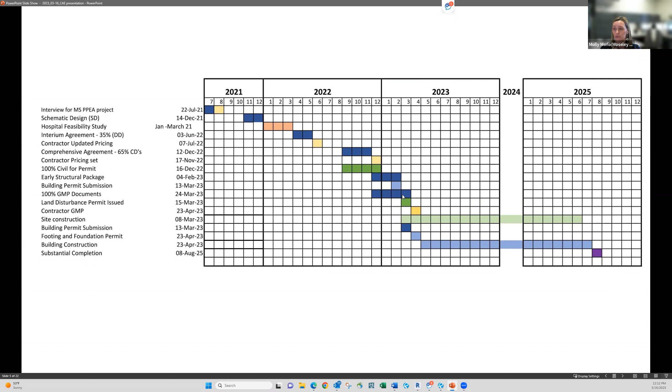Can you see my cursor when I'm talking? I don't know. Yes, we can.

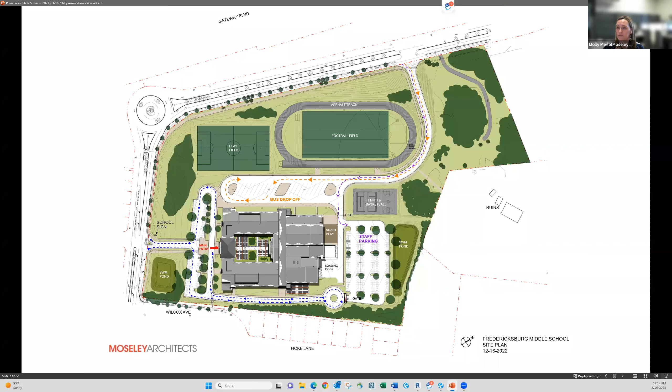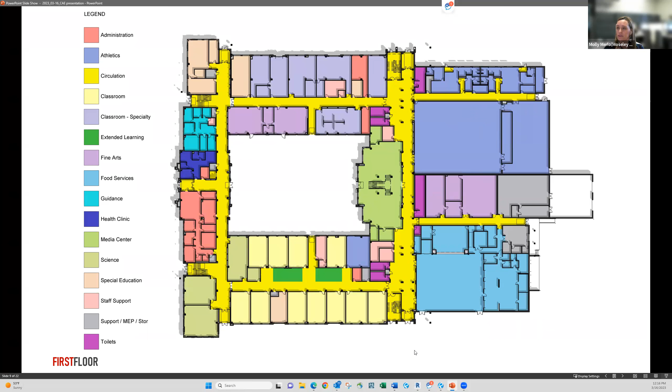I've got some renderings of that for later in the presentation. And then our kitchen, so a good multi-use space here with music behind. And then we've got a gym, an auxiliary gym in the purple with the locker rooms. That's our first floor, and then the looping circulation as well.

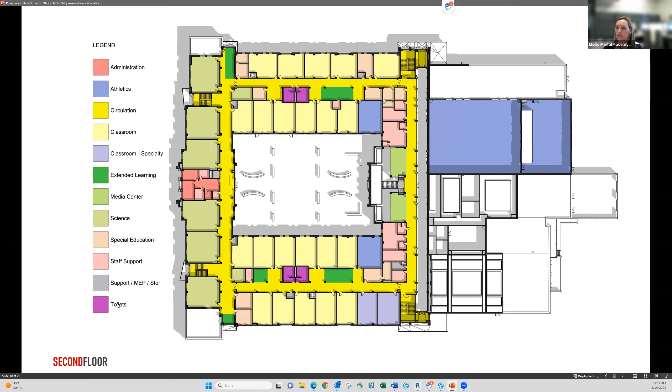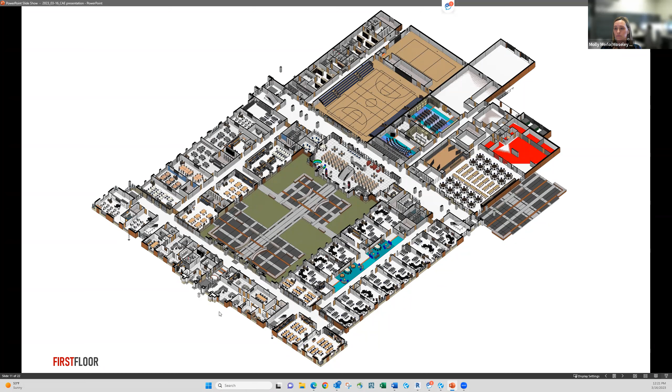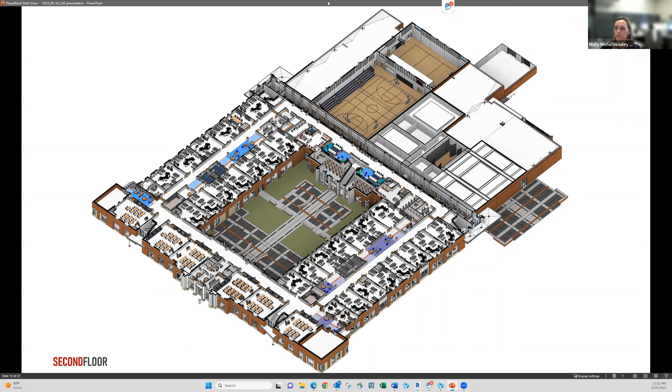And again, you see the second floor with the classrooms on either side, science toward the front. And then you can see the two-story extended learning overlooking the media center with a connecting stair, and then looping corridor connecting all of the academic wing together and easy access down to the first floor for the shared use spaces.

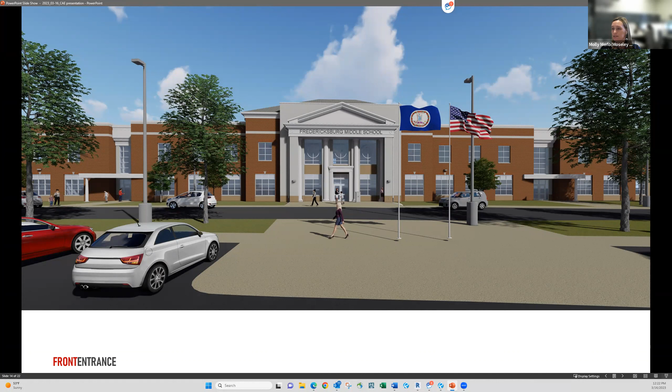So Fredericksburg being a little bit more classical and colonial architecture, especially the Idlewild neighborhood has a colonial feel to it. We stuck with more of a colonial approach for the school with main entry. There were proffers with the development of the school that it had to be mostly masonry, so this is a brick building. We do have some accent pieces here, but mostly brick with some FRP panels. And you can see the approach coming up from the parent drop-off toward the main entrance.

And then down the bus loop, you can see we've got several entry points - a welcoming entrance for after hours, prominent coming in for the gym or the cafeteria, auditoria, as well as entry points for during the day, the students coming and going.

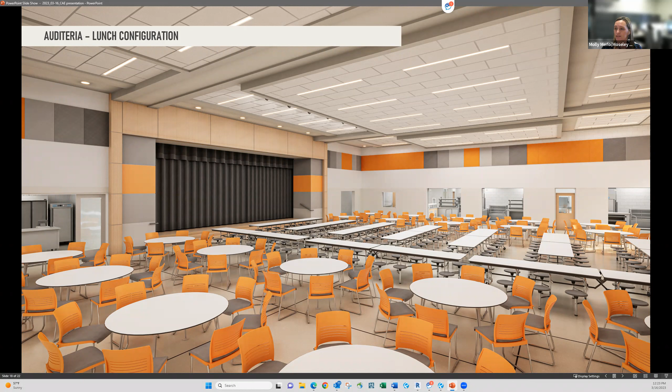And then this is the auditeria. The colors have not been set yet - this is a potential rendering. We have not decided on all of the color scheme, but this is one possible color scheme. And then this would be when the auditeria is being used for lunch, with the doors open to the kitchen serving lines and snack line.

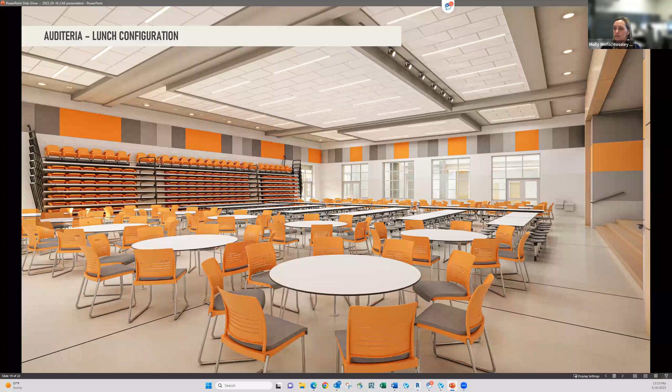So that's kind of an overview of the project, where we're at, and happy to hear if anybody's got questions or thoughts as we're coming into the finish line here.

Really excellent. Cool. Hey, thank you Molly. I have a question.

Sorry, I was a little late, but in terms of I see those extended learning collaboration areas - is that something that it was the goal from the beginning, or was that something arrived at in the process?

It was in the beginning when we discussed with Fredericksburg what they would like to see. They wanted to be able to have the extended learning opportunities. It's not something that they currently have, so it will have them kind of reaching and adjusting teaching styles in the way that they use the building. But they're very eager to embrace the extended learning opportunities and have the ability to break out in small groups and having the passive supervision.